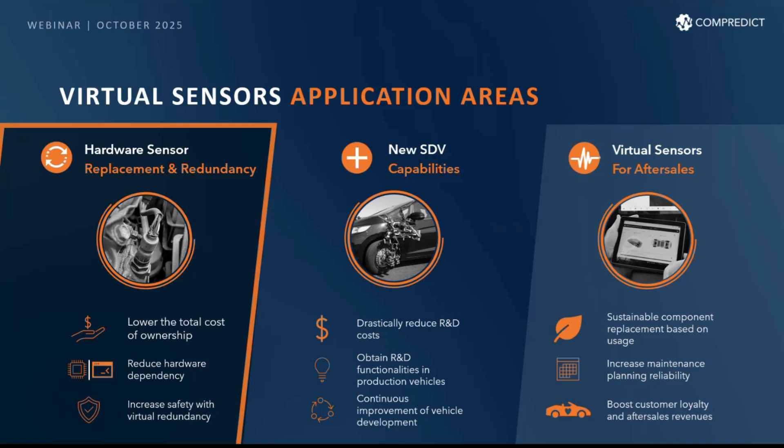So COMPREDICT has three main application areas for virtual sensors. Last time in the webinar, we talked about the after-sales business. Our next webinar will be about new SDV capabilities, but today we will focus on actual hardware replacement and redundancy solutions, with the benefit of lowering total cost of ownership, reducing hardware dependency, or increasing the safety of the vehicle and of functionalities with virtual redundancy, if you don't want to get rid completely of physical sensors. For the possibilities of these replacement and redundancy sensors, I will hand over to our product manager, Guillaume.

Thank you, Moritz, thank you very much. In the following part, I will mainly discuss our hardware sensor solution and how you can replace hardware with our software solution. First of all, let's have a quick look at our whole portfolio regarding hardware replacement.

The first one is headlight leveling, and the second one is tire pressure. From COMPREDICT's side point of view, these are 2 hot topics due to regulation and also due to the cost reduction that all OEMs are facing right now. So, obviously, we have 2 main benefits of our hardware replacement virtual sensor solution. The first one is cost saving.

By replacing hardware, you are reducing the BOM, the bill of material of your vehicle, and you have cost saving, and you can reduce your cost at scale regarding all the production that OEMs have.

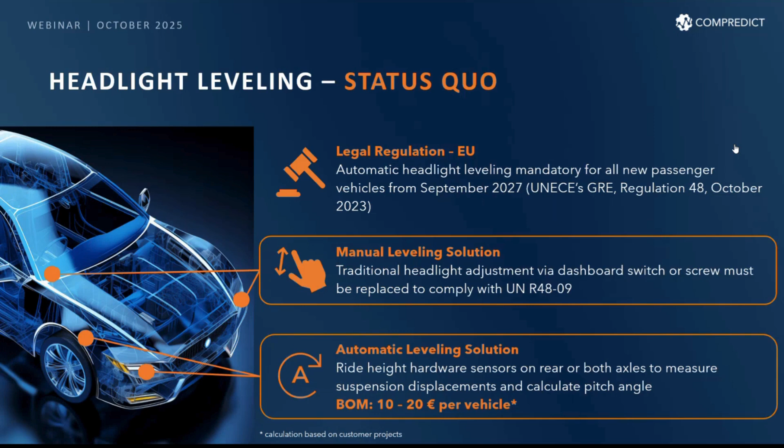Then, in response to this new regulation, COMPREDICT has developed a headlight leveling virtual sensor solution that calculates the pitch directly of the vehicle. It means that the pitch, which is the main input for headlight adjustment in static and dynamic way, is the output of our solution. As I already said, our solution is 100% software.

Meaning that we don't need any hardware anymore. As Moritz explained in the first part, we are only using some existing vehicle signals that you can find in any vehicle, and you don't need any additional hardware.

Also, one of the main takeaways we can have for this solution is that today it is working statically, but also dynamically. By static, I mean that our solution is working in all the different regulation cases defined in the new regulation of 2027.

It means that, for example, for an M1 vehicle, our solution is working in all 5 different load cases found in the regulation with pretty good accuracy, or at least with the accuracy that permits us to pass the regulation easily.

And secondly, our solution is also working dynamically. It means that in normal driving conditions, like acceleration, braking, slopes, or common driving conditions, our solution is working perfectly fine dynamically and permits the headlamp to adjust dynamically, with an accurate pitch angle calculation.

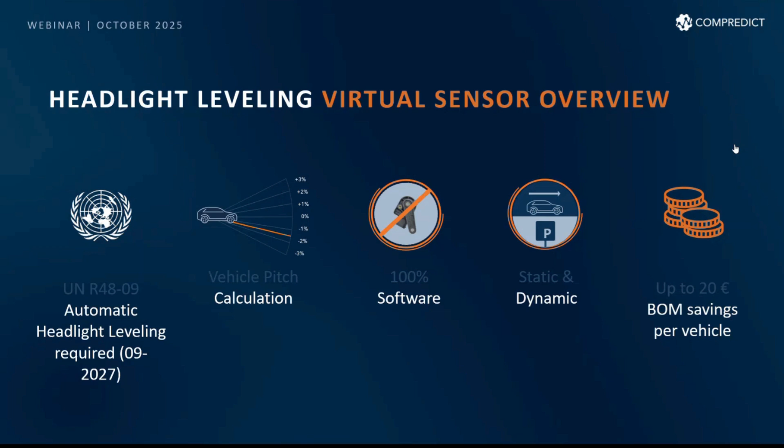So now, just a quick overview of what we call our virtualization approach. It means that when our solution is implemented in the vehicle, so when it's deployed in any ECU, by using the different signals that you can find in all the different vehicles, first we can accurately predict the static load changes.

Then we can have the prediction of the dynamic suspension travel on wheels, and based on these two different calculations, we are able to estimate the vehicle pitch angle. And as I already said, this pitch angle is the main input, the main target value, for the headlight adjustment at the end.

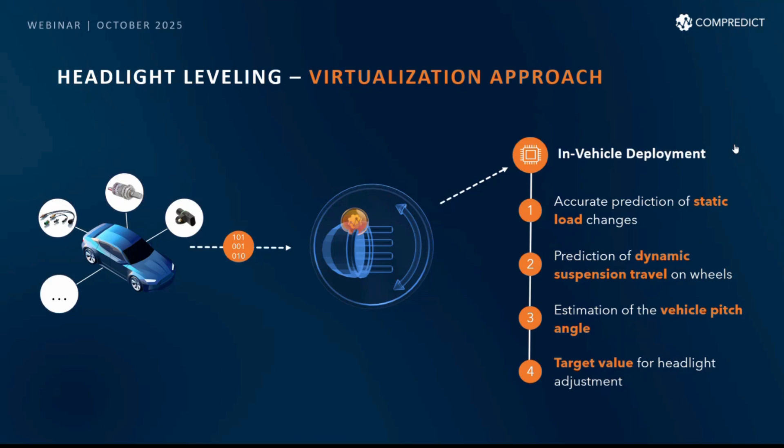So it's quite an interesting approach, and a very easy, very simple approach, yes.

And here, we can focus mainly on some first results that we have. Here you can see, firstly, the static specification of our headlight leveling solution. In the plots, you can see 3 different load cases that you can find in the regulation.

The first one, the A case in the orange A box, is the first load case of the regulation, the driver only. You can see we loaded the first seat of our demo vehicle, which is the reference for this estimation and calculation. We loaded the first seat with 75 kg. Then the second load case is in the C orange box.

So it means that we have loaded all the different seats with 75 kg. This is the third load case of the regulation, and the last one is the final load case, when we load the driver and also put the maximum load on the trunk. You can see in these results that the root mean square error, the accuracy of our model, is quite good. It's less than 0.05% for driver load case only, and less than 0.15% for the 2 other load cases, which is quite accurate and permits our model and all the vehicles to meet the certification criteria easily.

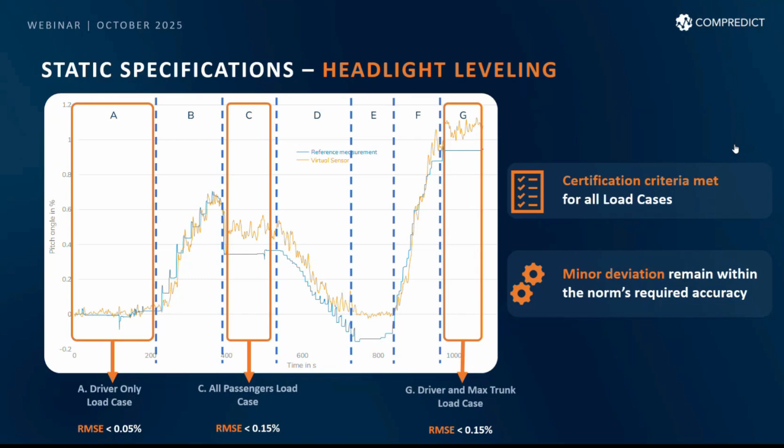So that was the static specification, and now if we go more in detail on the dynamic one, you can see there are 4 different plots. Before going into detail on the RMSE accuracy, you can see that the calculation trend of our estimation is quite good regarding the reference. In the 4 plots, the reference is in blue and our calculation is in orange. You see that the trends are well identified, and all the different peaks and parts are well estimated. The two upper plots show normal driving and braking acceleration, which we consider common driving cases. For those 2 cases, we have an accuracy of less than 0.15%, which is quite good and sufficient regarding the main driving conditions we face in normal life.

The 2 last plots show driving slalom and driving on a bumpy road, where we can see some minor deviation, especially during rapid or high frequency events. But for those 2 dynamic conditions, we don't think it's an issue, because regarding the performance of the actuator that adjusts the headlamp, those rapid or high frequency events are too quick to be captured by the performance of the actuator. So what we see is that the accuracy we have for normal driving and braking acceleration is quite enough in dynamic conditions for headlight adjustment right now.

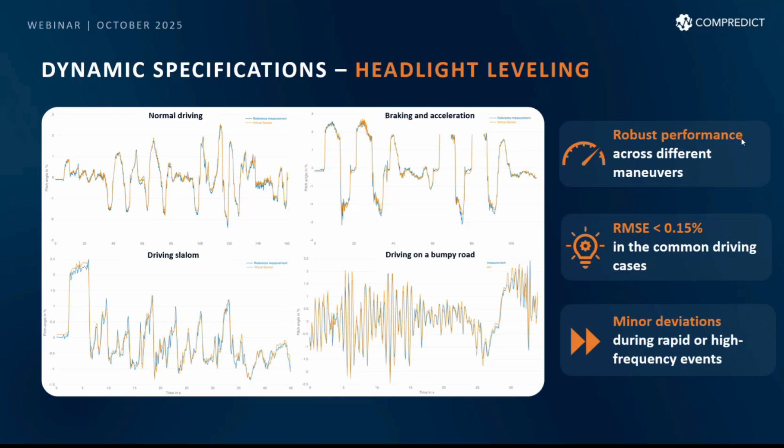In a nutshell, regarding headlight leveling, from static and dynamic points of view, our model has quite robust performance across different maneuvers and also from a static regulation load case point of view. The RMSE is globally under 0.15% in all the interesting use cases, which is quite sufficient to have a performant solution right now. We only see some minor deviations in some edge cases, which from our point of view is not an issue for headlight leveling adjustment right now.

So now let's go on to the tire pressure virtual sensor solution. Today, as you may know, there is a regulation since July 2007 that asks for mandatory tire pressure warning for all new passenger vehicles. Tire pressure warning, TPW, is just a warning that warns the driver when you have a deflation of a tire, or what we call a diffusion of a tire, meaning all the tires are deflated at the same time. But from a regulation point of view, you don't need a real tire pressure value, and it's not asking to know if you face a deflation or diffusion case, or to know which tire it is. So TPW, tire pressure warning, is just for the regulation right now.

But there is also another solution in the automotive world, called tire pressure monitoring system, when you are using tire pressure sensors, one on each wheel, giving a value for each tire in real time. The main benefit of this solution regarding tire pressure warning is that you are able to ensure proper inflation of every tire, increasing safety, because you don't need to wait for a warning when your tire is deflated by more than 20% to have an alert.

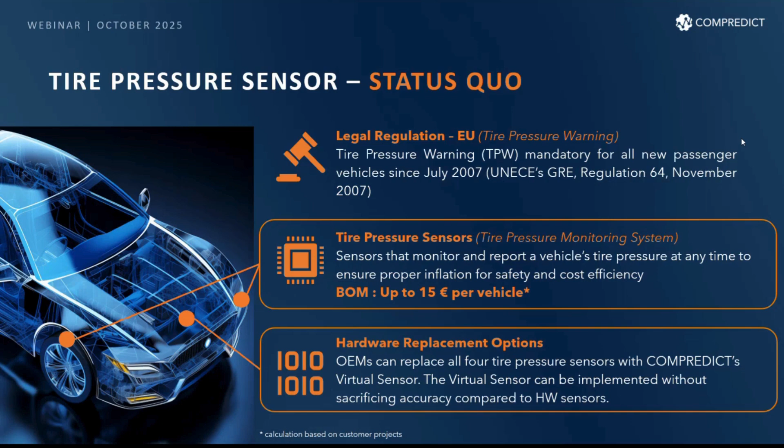And at COMPREDICT, that's what we are able to do. So today, our tire pressure monitoring system virtual sensor is not just a tire pressure warning, it is the first direct TPMS virtual solution, meaning that without any hardware, by removing all the TPMS sensors that you can find in all four wheels of the vehicle, we are able to calculate a real-time pressure value for each tire, and save up to 15 euros per vehicle by removing the hardware sensors, but also the receiver and everything related to those hardware sensors. So our solution today is the only direct solution able to calculate real-time pressure value virtually without any hardware sensor. And as I already said at the beginning, this solution is 100% software, so you don't face any failure related to hardware sensor wear or tear.

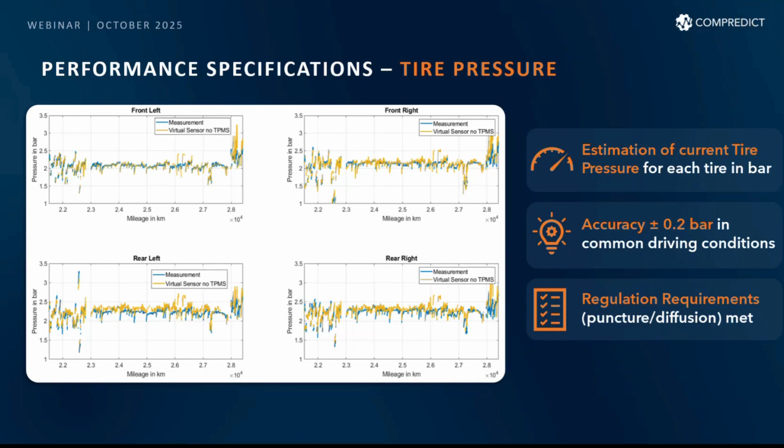I think I will hand over to you, Moritz, just to get answers for the hottest FAQ.

Sure. As you now heard about our technology, there are a lot of questions about how it works and what the boundaries are, so I will take the next few minutes to dive deeper into the FAQ we regularly receive from customers regarding our technology.

The first question we regularly get is what kind of data is required to run the virtual sensor. As already explained, we only use readily available CAN signals in the vehicle, mainly focusing on wheel speeds, accelerations, and deceleration values. We split these signals into required signals, where there's no point for discussion - if these are not available, sensor deployment is not possible - and optional signals that increase the accuracy of the virtual sensor.

The second question we usually get is the minimum sample rate of the signals for our input. It heavily depends on the sensor, but typically 10 to 100 Hertz of CAN frequency is required. In modern vehicles, this is usually no issue, as the standard CAN speed is typically 100 to 200 Hertz, so we usually don't face issues for integration. The higher the requirements to the dynamics, the higher the sample rate of the inputs must be - it's just physics, and I guess everyone can understand that.

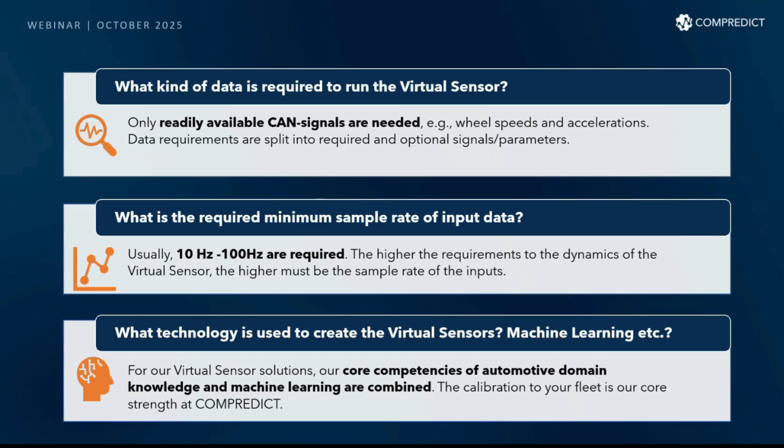Another question we get is where the virtual sensor is running - is it offline, is it in the car? Our virtual sensors are in-car sensors, actually there to replace physical sensors, and are not cloud or offsite solutions. But there is no additional ECU required that we deliver. Our virtual sensors can be deployed and integrated into existing ECUs, especially with the upcoming trend of more powerful ECUs that are even able to handle the processing requirements of our sensorics.

Based on that, the next question is usually how many calibration versions per virtual sensor are required for various vehicle variants. And here the answer is always: it depends. It mainly depends on the influential vehicle design parameters, especially for which domain and which sensor you want to replace. If the basic design is equal, the probability is quite high that you don't need various calibrations, and you can compare it to traditional software running in the vehicle and the typical variant management that established Tier 1 suppliers have to face across a vehicle platform.

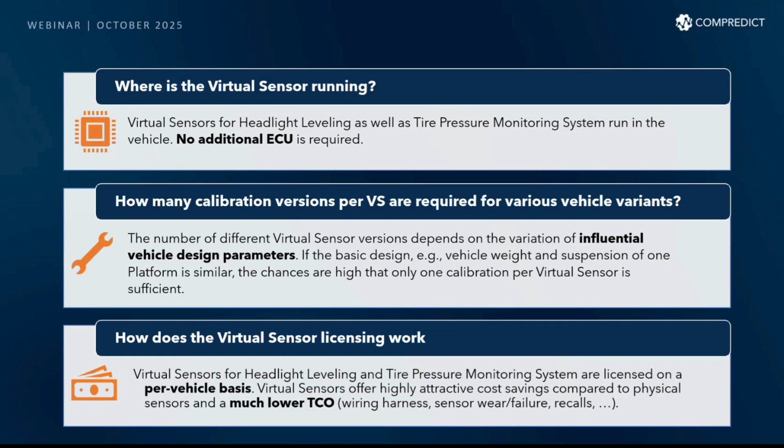I hope this brief introduction into the FAQ gave you a better overview and answered most of your questions, so that I can hand over again to Guillaume to go into more financial stuff.

Thank you, Moritz. So to finish this webinar, there are mainly two things to take away. The first is that with our virtual sensor solution, the OEM can save millions at scale by replacing hardware sensors. This is the main point and benefit of our solution. The second is that our software solutions only use existing vehicle data that you can find in any vehicle to replace legacy hardware. It means our solution, as Moritz already said, could be implemented in all SDV vehicles, any vehicle with data, and with our solution you can save millions at scale.